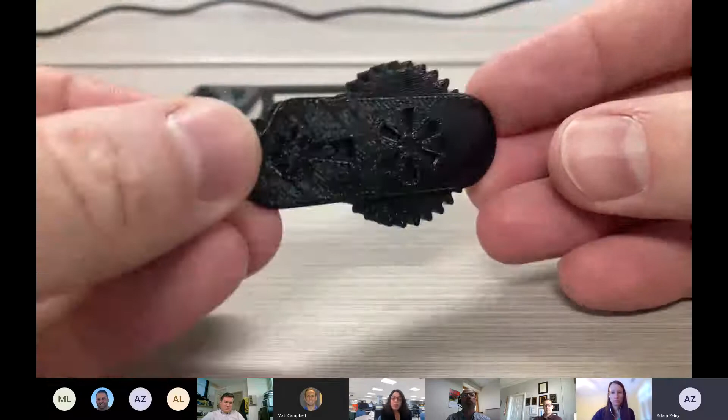Okay, so first and foremost, I just want to show you this finished part here. I made this because I really wanted to push the limits of one of our printers. In this case, this is the Stratasys F120, that beautiful giant box behind me. Really love working with this printer. It's really an oven, it looks like an oven, and you can almost bake stuff in it, that's how hot it gets.

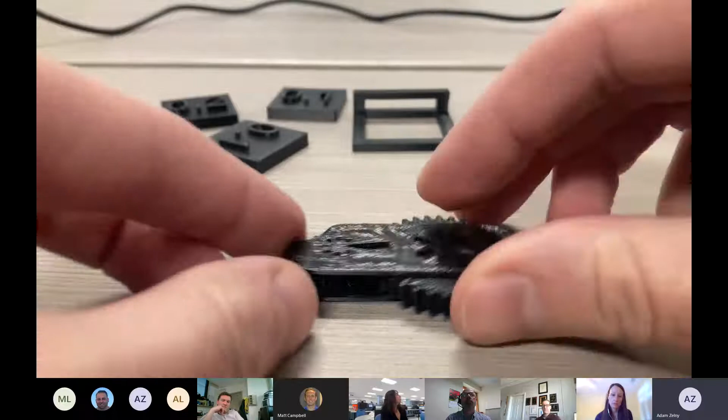But that's what this was printed in, and it was printed with a dissolvable support that, when it printed from the ground up like this. Using a solution bath, we remove all that support and reveal a functioning mechanical part.

Now, Dave was here when I was going through making some tests of this. The first model of this I did not have these cutouts in here. Dave was helping me remotely because I'm actually based in Worcester, so I was sending some files for Dave to print and asking him to put them in the solution bath. He said, hey, this one actually didn't work. Here's one of the older ones right here. You can see it's just flat, but I tore it open just to explore why it wasn't working.

I think a big part that's very interesting for this design process is when you're dissolving the filament, there are very few orifices for the dissolving liquid to move around and actually get into the crevices that have support material. In this case, there was support on the outside of this cylinder, but the only place for the fluid to travel was between this thin layer and the gear face.

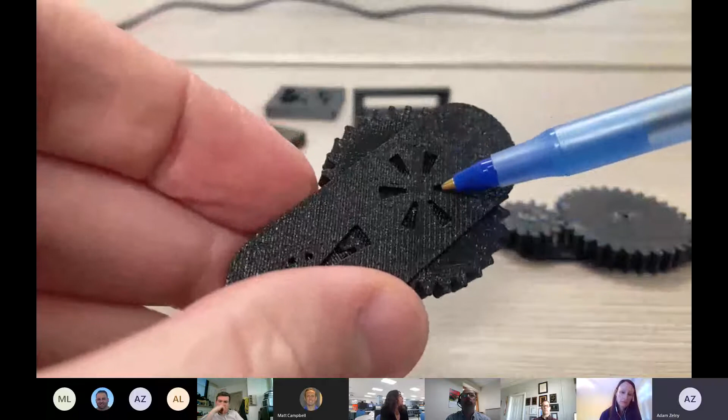So with this design, I created these cutouts that go all the way in—let me get a pointer here. This cutout goes all the way to the base of the cylinder, with the concept being that the liquid could come in here and wash into the cylinder all the way through to the other side. Same thing over here, all these little cutouts.

This one I just kind of did because I don't think it was 100% necessary, but I thought it would be cool to have a little window to see the actual tolerances, to highlight where the gears connect. You can see it's actually pretty spacious—not as tight fitting as I'd like it to be. That's exactly why we're producing these tests here.

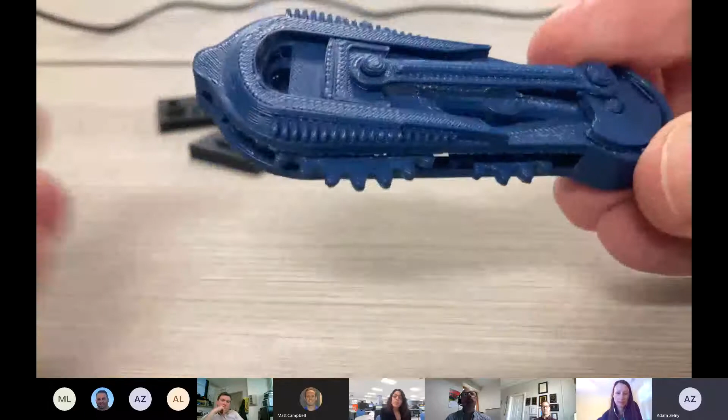Now I'm going to put this one to shame a little bit and show you a fancier sample that a Stratasys specialist designed specifically for what we're doing today. This is the exact same concept—he designed it to be printed on the F series machines. The filament gets dissolved, and it reveals this mechanical device.

This here is still a little rocky—I'm turning it now, and you probably can't hear it, but there's some grinding in there, it's providing some resistance. So it wouldn't be optimal if we were looking to create an actual functioning gearbox for a vehicle, or perhaps a robot system, or any number of applications that would use gears.

Adam, I'll let you know—because I printed so many of those things out over the years and gave them to people, I would use a little tiny squirt of WD-40. It would go so far in helping with the motion. Just another little trick, just like regular metal mechanical parts, on any given bicycle. Yeah, that's pretty neat.

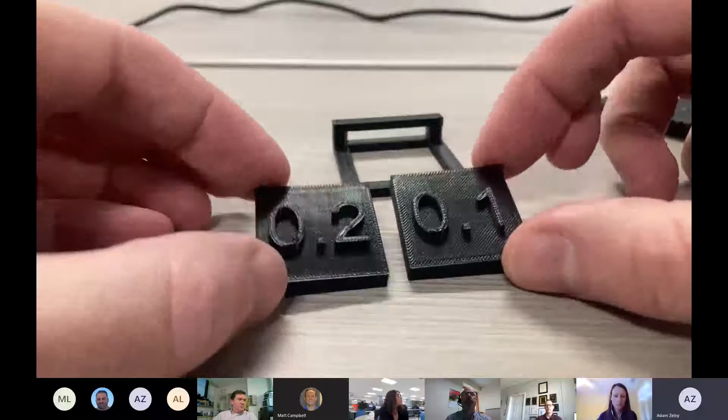What you're seeing back here are preliminary tests that I would do. Before I had that on my slide, I had X, Y, and Z, taking into account the precision of X, Y, and Z. Actually, this one I'm going to get rid of. What I did here was make these little templates that represent 0.1 millimeter or 0.2 millimeter on every side, every face.

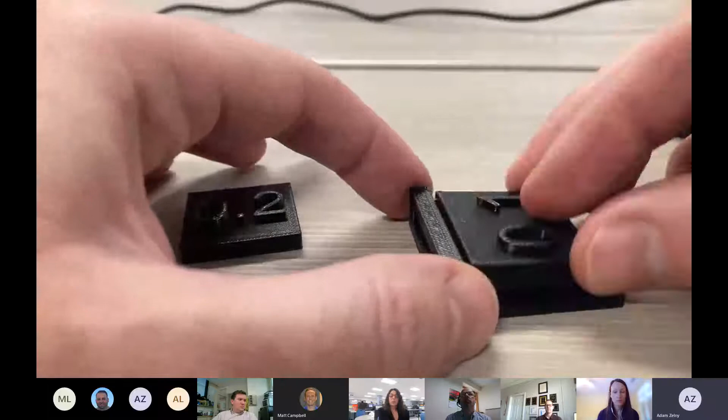So if I use my control piece that is a set dimension, and I fit this 0.1 millimeter in, it's actually quite snug. But you can see it does fit—I can get this in here, but it's really pretty tense.

And then the 0.2 fits in nice and smooth. Bear in mind though that this is also only on the XY—the tolerance or precision based on the XY plane. For Z, I created a little extra slot so I can slide them in, and I also compensated for the height of the piece, so there would be 0.2 millimeters on the top, bottom, and sides—pretty much the same situation.

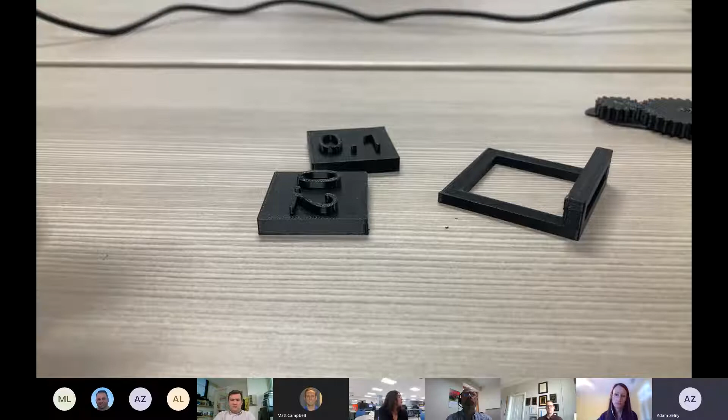These are all printed on the F120, which is definitely a machine that does a really great job producing accurate parts. It's a great prototyping machine, that's for sure. And I say prototyping, but especially when working with students—high school or university—and looking to produce entry-level production parts, you absolutely can do that in these printers. There's nothing wrong with that, and you learn a little something about what sort of materials work best.

So what I'm going to do is swap back to my screen.

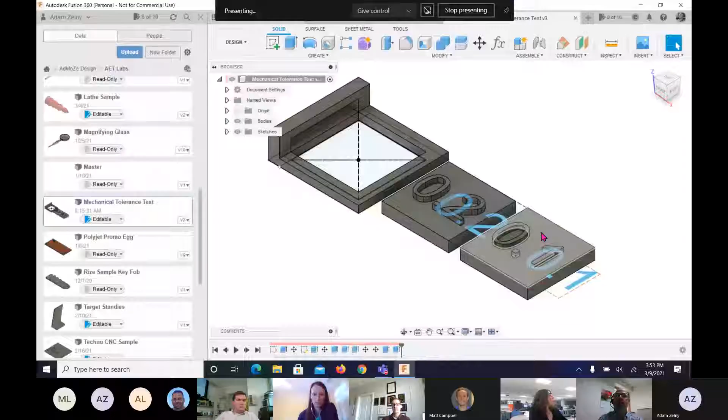Okay, let's see. Okay, so here we have just the two files that I've been exploring here.

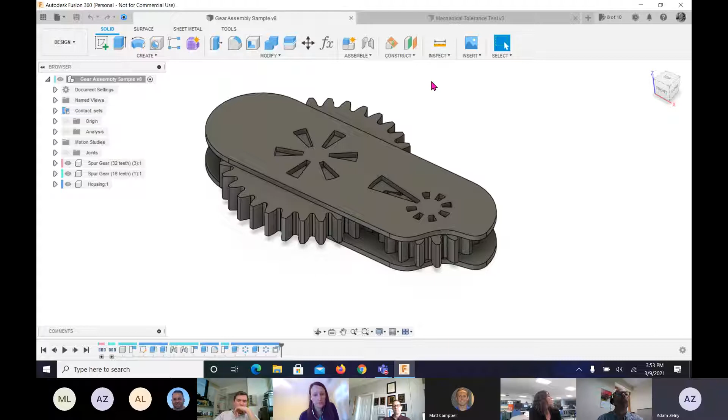For this gear set, for those of you using any CAD, I would suspect this is available elsewhere too, but one thing nice to point out is Fusion comes with a sample add-in that allows you to create gears. Let's see, where is it? Trying to see where it is exactly.

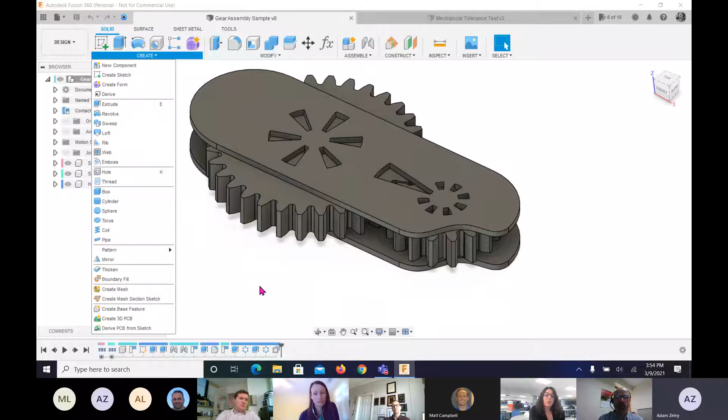Maybe it's turned off, but it would be down here. It's basically a really simple gear creation tool that lets you automatically populate gears as a component. So let's hide the housing here and just give you a peek at what that looks like.

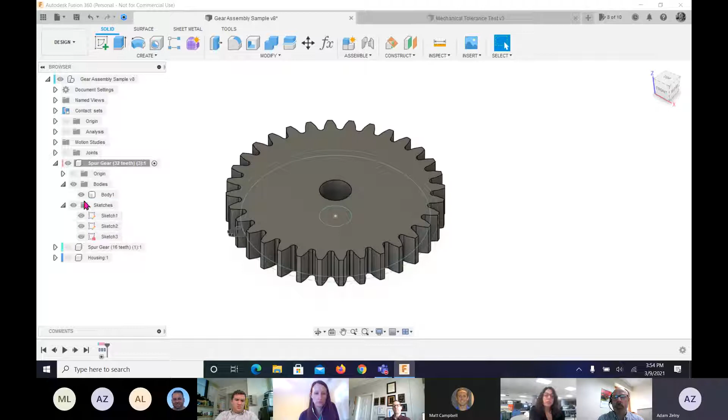So here's my 32 teeth gear. When you create it, it produces the sketches that the gear is derived from. You can see here's the tooth right here. It'll just do one tooth and then populate that around the outer edge. It's a really neat feature.

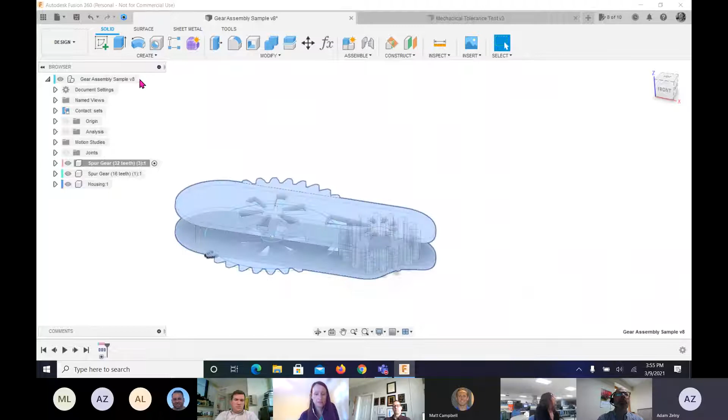I did this very quickly. If I were working with students on creating test parts like this, one thing I would focus on is the parametric aspect. In here, you actually see I have a few values.

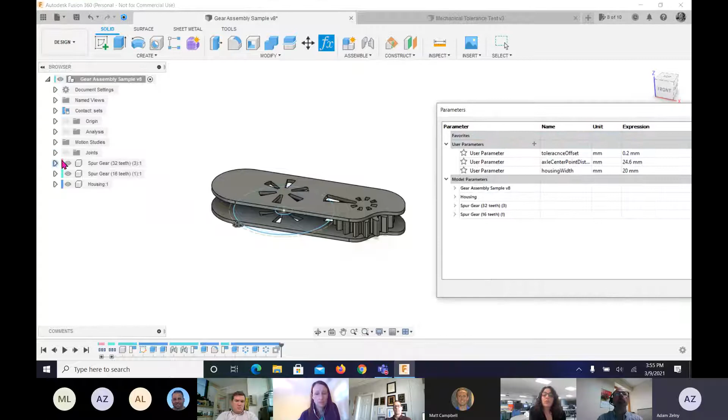I have tolerance offset, axle center point distance, housing width, which isn't really a big factor, but axle center point distance. Let me bring this back here. So where am I at? It's 24.6, I'll just type in 30.

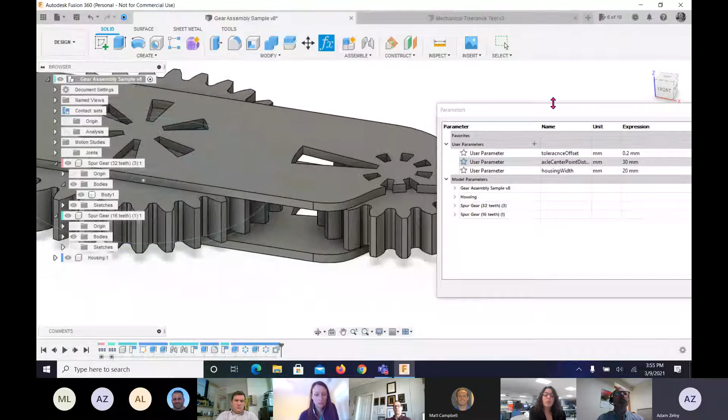So I would have to tie this to my housing, but you see that the axle of the housing and the gears separated. So that's one way I can control the tolerance between my gear teeth, which is a nice easy thing to do as long as you know what you're getting into there.

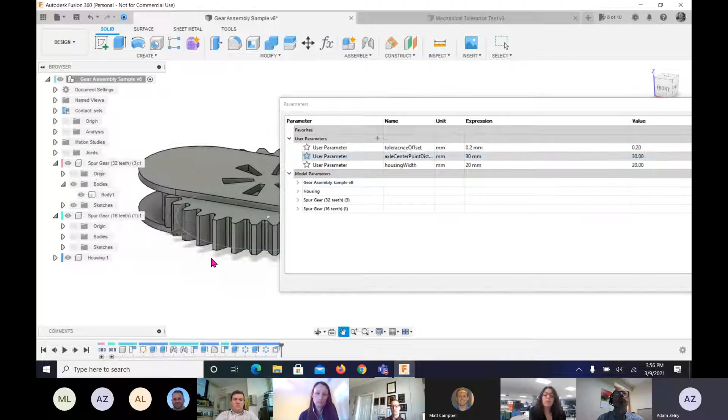And the other one I did was a tolerance offset, and I think I may have done that. So if we look at a side view here, this is really what I wanted. This is one of the important elements of this test here, and something I want to touch on as well.

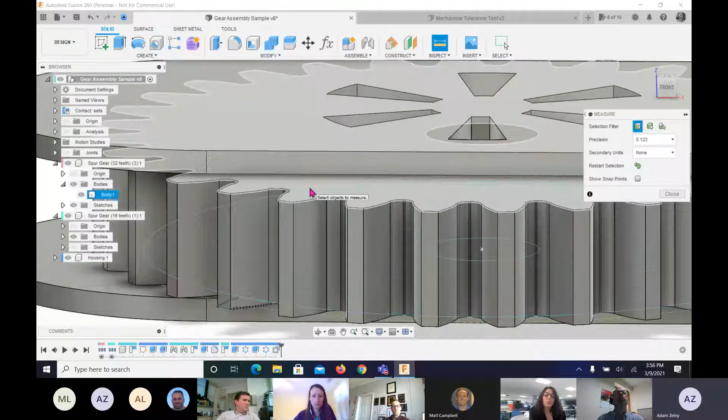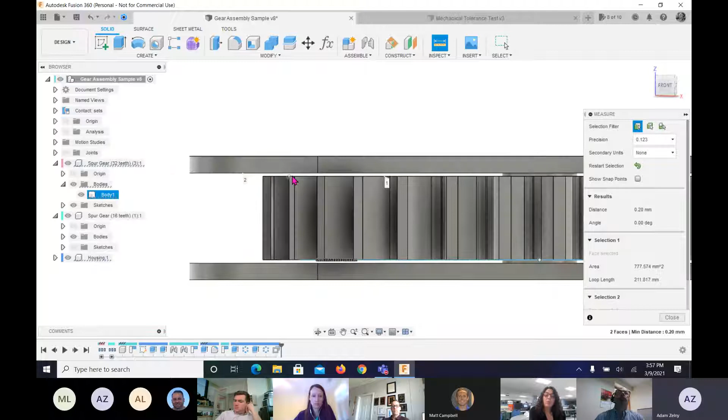If we look at our side here and do a quick measurement of this surface to this surface, we get a distance of 0.2 millimeters. Now you can imagine if you had a 3D printer that had a limitation of printing in 0.3 millimeters, it wouldn't actually be able to create this gap successfully. It might try its best, the slicing software might try its best to calculate how to do it, but it probably wouldn't work out very well.

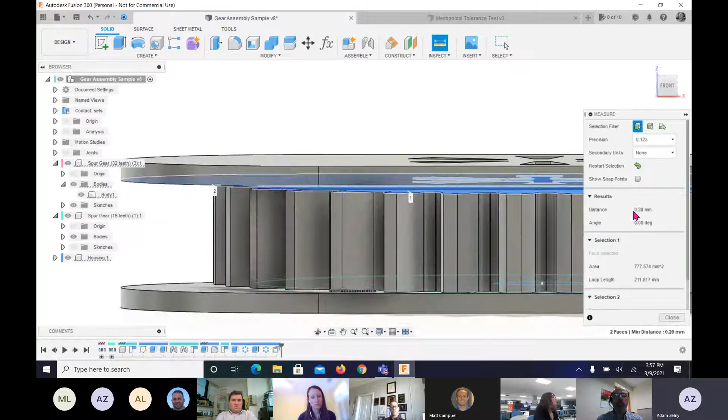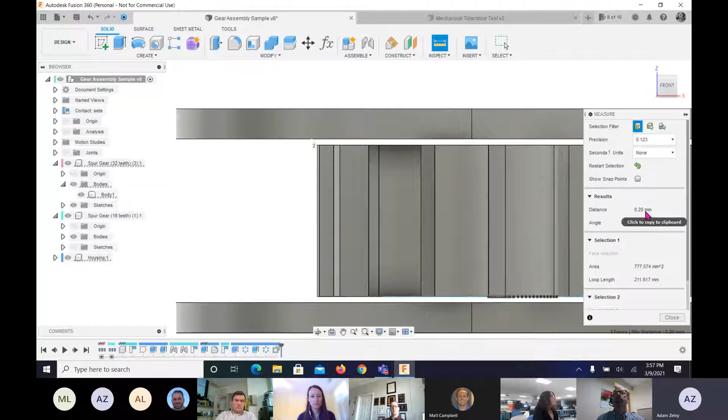So this is an interesting element when you're designing for mechanical tolerance, designing assemblies that have mechanical elements, is knowing what resolution you're printing with. In this case, remember I keep going back to X, Y, and Z, and separating X,Y from Z: this would exclusively be based on your Z resolution. So if your accuracy for your layers was 0.1 millimeters, you would assume you would be safe printing a 0.2 millimeter gap between these two parts.

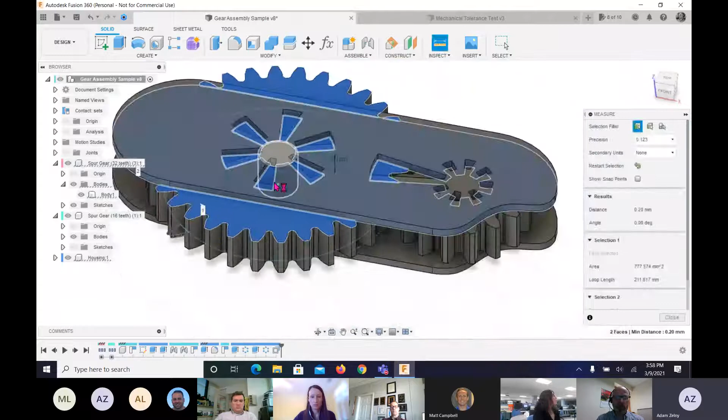And I should just go ahead and open up the slicing software too while I'm at it. On the other hand, for the XY tolerance, I can go into, let's see, my housing sketch here.

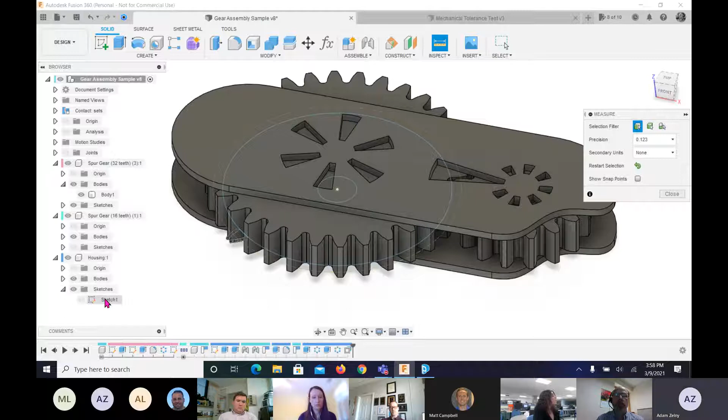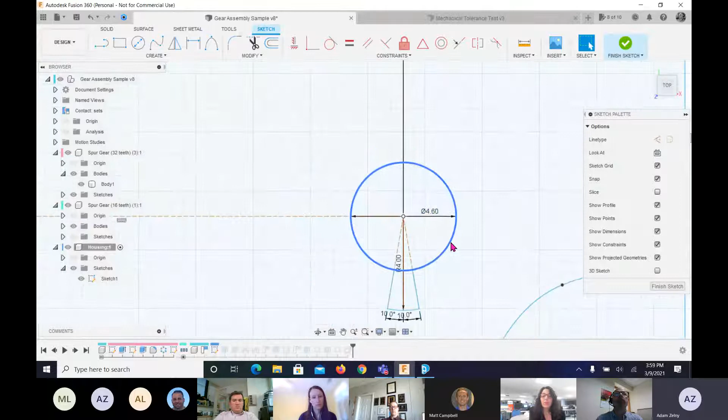And my diameter, these are all values that I could attribute variables to. I could say this is just an axle diameter, and another variable would be inner gear diameter. But here I did 4.6 for my axle diameter, already knowing that the hole in my gear is 5 millimeters.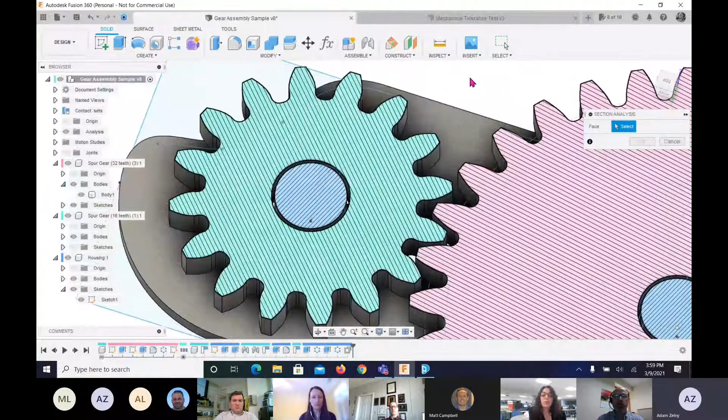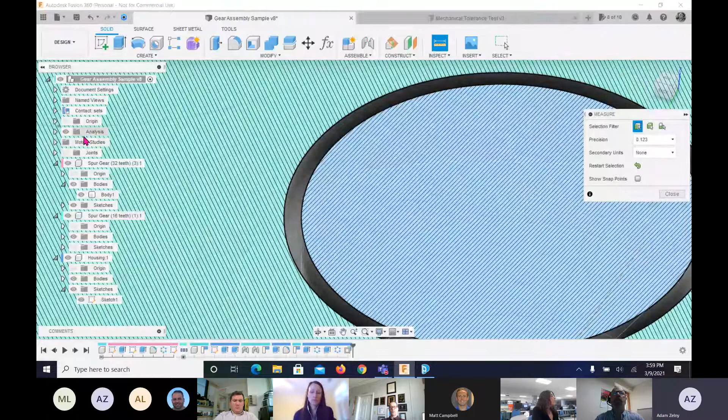Okay, so here I have a section analysis just to kind of cut into the model. This is a nice feature because we can really take a look at our tolerances between these two parts here. I could go in, and with my analysis, Fusion populates it in the browser tree over here. Now I can go and inspect two faces a little bit closer that I couldn't access before.

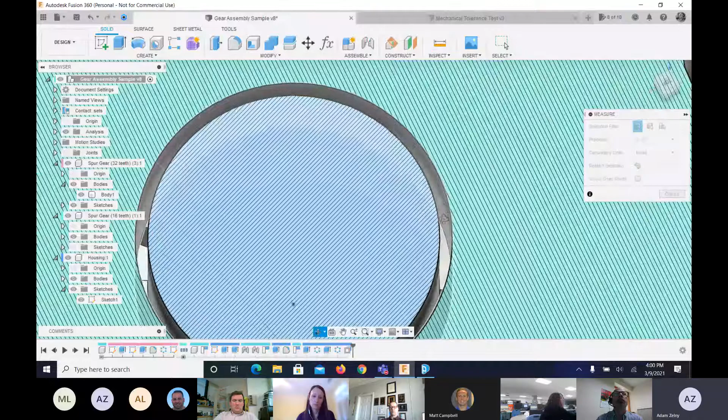But this gap here is determined by the XY toolpath. It has nothing to do with Z in this case. So that's just a little glance into my workflow as I went through preparing this.

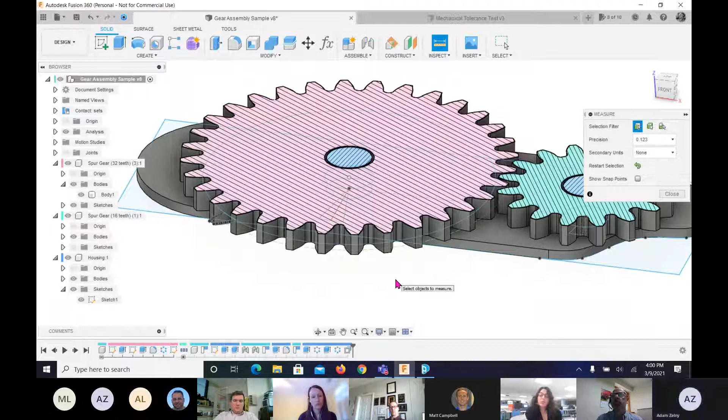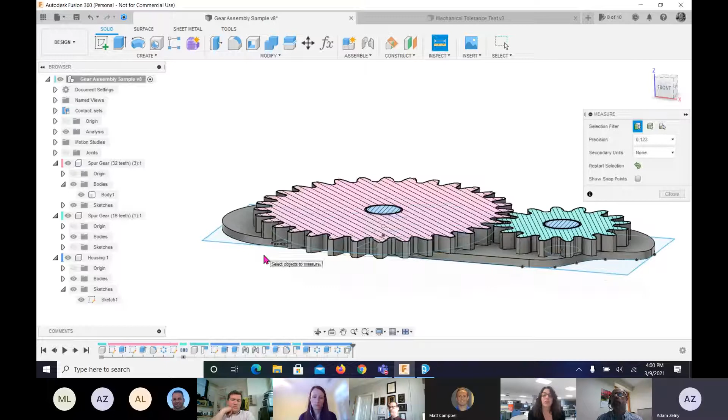Now, another thing I want to point out with respect to this model is this is a bad model. This is the type of model I would show students, and I would say, how would you change this? If you were to actually use this in some sort of gear system, how could you improve it? When I showed you the physical model, the body itself right here is very flimsy - you can bend it with your finger, you could break it quite easily. But these printers are capable of producing some really strong parts, especially if you're making parts that are solid all the way through. It's pretty neat.

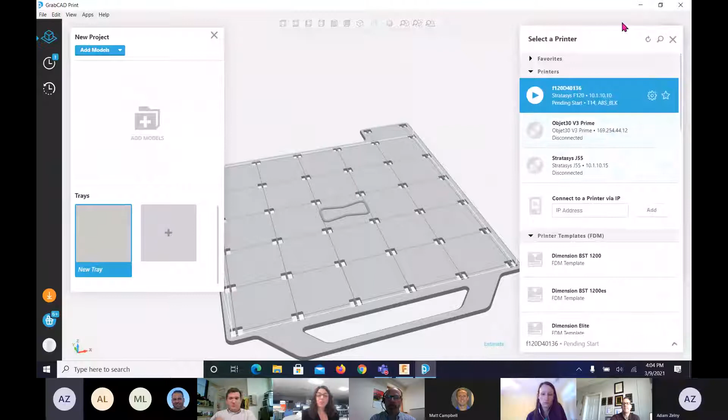So short answer, Dave, is I did not, but I like that you brought that up because I did want to open up GrabCAD here - that would be a great place to show it, probably. Yeah, so we have our F120 here.

Yeah, so what Dave is referencing - let's just slice this model - is the thickness of like a bead of plastic in this case, right Dave, on the XY plane?

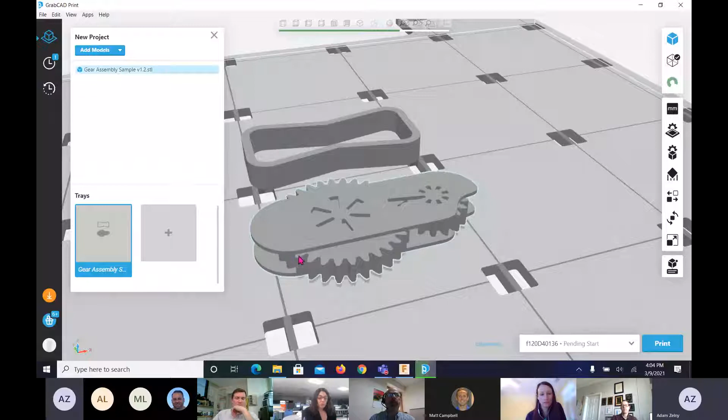Yes, yeah, and I think you can really see it like in that. Yeah, exactly, you can see the two layers in the XY direction. All right, even better. So that's a good thing to take into account.

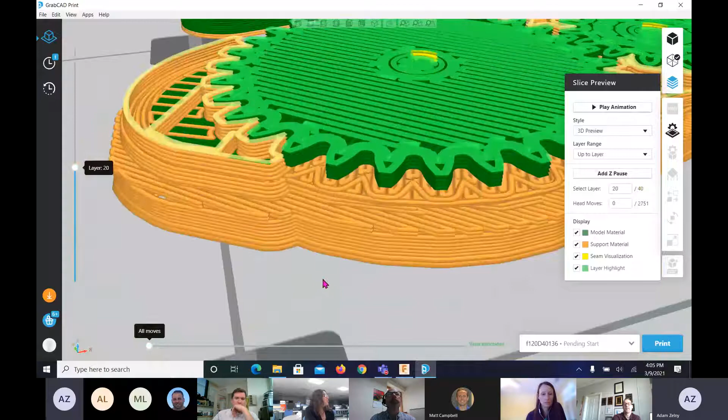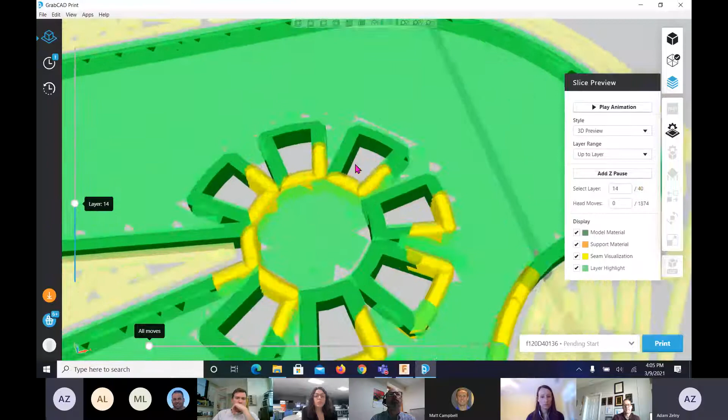Yeah, when you're doing thin walls on the XY plane - in this case, I don't know if you remember when you saw my physical model, these little holes here were not high resolution, they were a little muddy, and they could have been a little bit bigger in order to maximize. We're really kind of cutting it close with our beads of plastic here that are getting laid down.

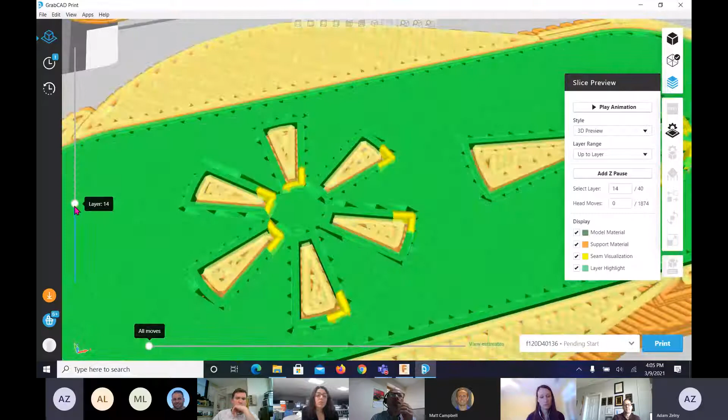Yep, so another place to think about it is when you're doing something like this.

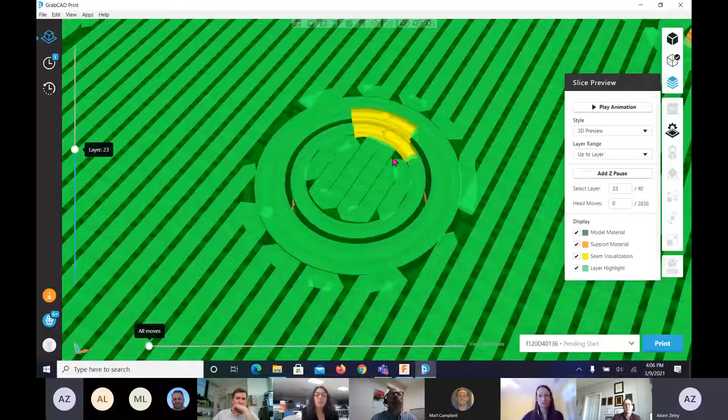Typically, by default, a wall will consist of 2 beads of plastic, which you see here on the inner wall of the gear. This is actually the gear body here, but then here is the cylinder. In the cylinder wall, probably because of the diameter of it, it did not print 2 beads, which perhaps could have improved the strength of it.

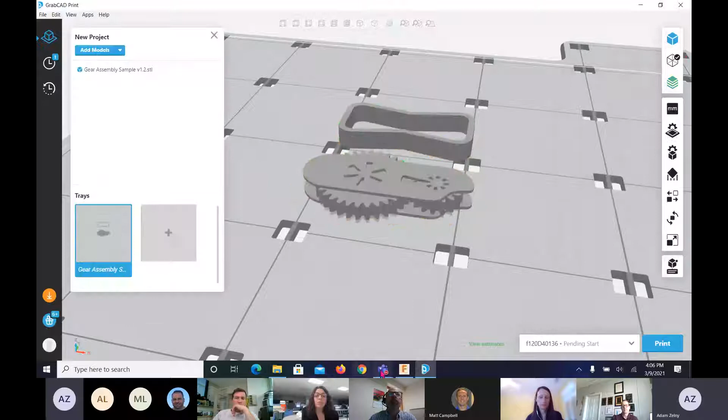You know, while I have GrabCAD open, one thing for those of you that use GrabCAD or other slicing software that might take advantage of this. Let's see if I have a file saved for this.

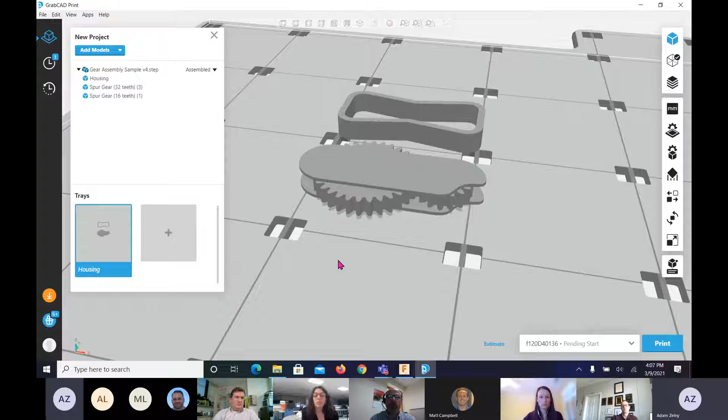So sometimes I notice that when I've worked with people who are just getting started with 3D printing, a lot of folks think that STL is the only file type we use with slicing software. Some slicers may be limited to that, but GrabCAD absolutely is not. If anything, you might benefit from importing a native CAD file, like a step file.

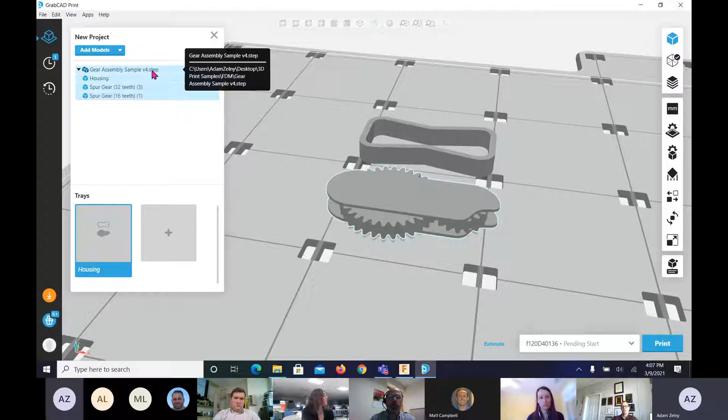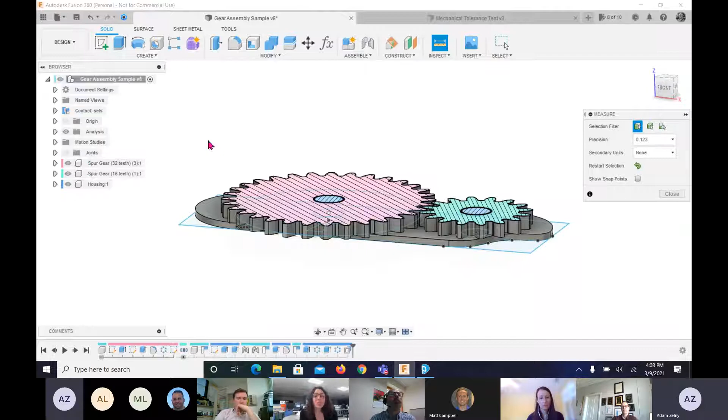Up here, you can see gear assembly sample v4.step. What's really neat about this in GrabCAD, and this gets really exciting when you get into printers that can do multicolor or multi-material printing, is that all of the components are still isolated, just like they were in Fusion. So here, if we broke them down, you see our gears, the housing, and if we pop over to GrabCAD, it is also isolated housing, spur gear.

And you can even choose, let's say if you're doing some experimentation, to isolate parts of your print. It's kind of like a hybrid of taking your CAD file and fine tuning it in your slicing software, which is a pretty cool feature, I think.

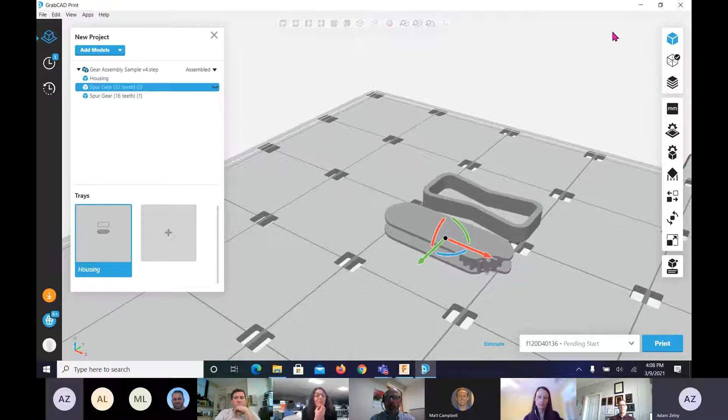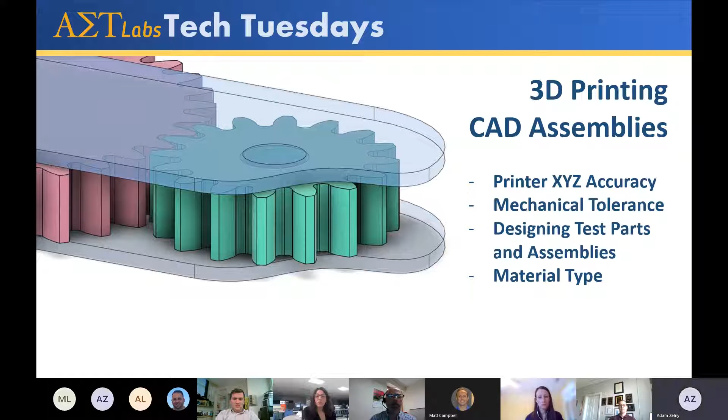Okay, so what I'd like to do, I did want to pop over to a couple of topics I was thinking about as I spend time working with educators and hearing the obstacles encountered in the classroom environment with digital fabrication.

How are you, what are your ideas? Do you need help with those ideas? What sort of obstacles are you coming across after having the printer for a while?